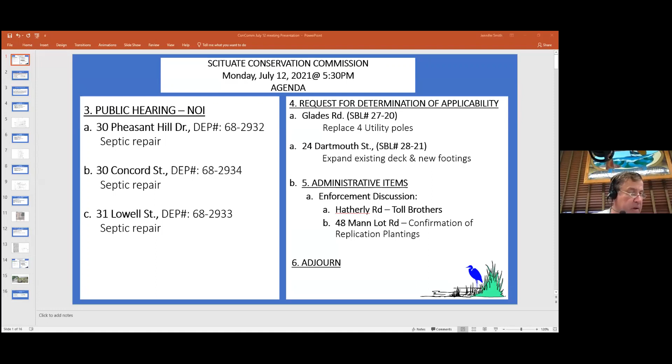Okay, we can move right into 30 Pheasant Hill.

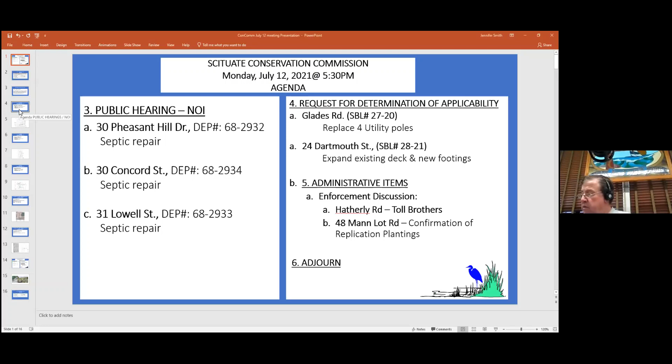On July 12th, 2021, 5:30 p.m., the Town Hall, Scituate Conservation Commission will hold a wetlands hearing under Chapter 131, Section 40 of the Massachusetts General Laws and Section 30700, Town of Scituate Code of Bylaws, regarding the application of Richard Hom and Janet Camacho for work related to a septic repair at dwelling at location 30 Pheasant Hill Drive, Scituate. Abutters and other interested parties are invited to attend. Information to access the meeting is available on the agenda posted on the town website.

Okay, we have someone from Morse Engineering. Yep, for the record, James Garfield. I'm an engineer at Morse Engineering, here tonight representing the applicant for this notice of intent associated with the septic system repair, 30 Pheasant Hill Drive.

Our property lines are shown here in bold. Pheasant Hill Drive is down at the bottom of the page. The existing 3-bedroom house is centered on the lot. The subject resource area is a BVW shown to the rear of the lot in a blue line. We also show the 50 and 100-foot buffers in red and green. The existing site is serviced by a failing Title V system composed of a septic tank and leaching field in the rear yard, the majority of which lies within the 50-foot wetland buffer.

We're proposing a new septic tank and pump chamber, which will pump the effluent uphill to the front yard, to a Presby EnviroSeptic leaching field, a portion of which actually resides outside of the 100-foot buffer, and all of which, in terms of the leaching field, resides outside of the 50-foot buffer. We're also proposing an erosion control barrier down gradient of the proposed work. So with that, I'll leave it to you for any questions.

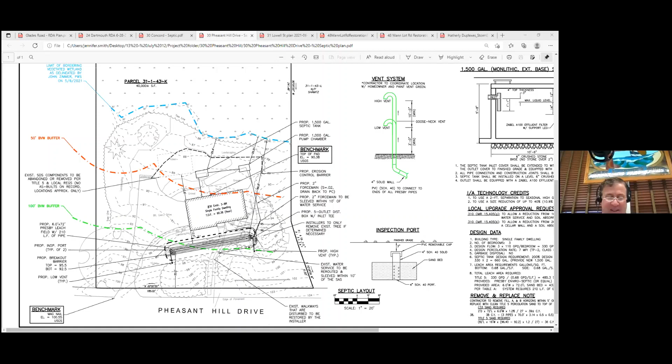Thank you. Number 30 Concord. On July 12th, 2021, at 5:30 p.m. in the Town Hall, the Scituate Conservation Commission will hold a wetlands hearing under Chapter 131, Section 40 of the Mass General Laws and Section 30700 of the Town of Scituate Code of Bylaws, regarding the application of Tom Epwich, for work related to a septic system and a dwelling located at 30 Concord Street, Scituate. Abutters and other interested parties are invited to attend. Information to access the meeting will be available on the agenda posted on the town website.

And we have Morse again. For the record, James Garfield with Morse Engineering, here for the septic system repair along with this notice of intent at 30 Concord Street. This site resides in Humarock. The total square footage of the lot is 7,500 square feet, and the existing 3-bedroom house takes up a good portion of that. The site lies entirely within FEMA flood zone AE elevation 13, and it's currently serviced by a failing Title V cesspool located in the rear yard. We're proposing a new 1,500-gallon septic tank, which will flow by gravity to a crushed stone leaching field in the right side yard. There's not too many other places to put it on this site. So with that, I'll leave it to you for any questions.

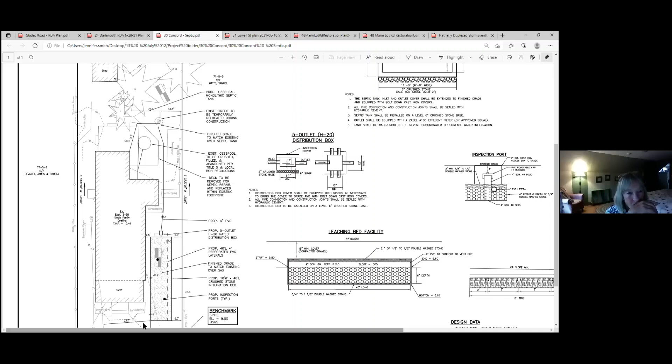Thanks, Doug? No issue with design. Squeezing it in there, you're right, no place to put it. And it's the same issue as the last plan, so I'll go ahead and say it: James, either the bearings or your north arrow is wrong on both of these plans. Glad I didn't do them. Whoever's under the bus right now might as well change the oil. I'm doing your brand new surveyor a favor, have him check that. All right, I'll let them know. Good, thanks Doug.

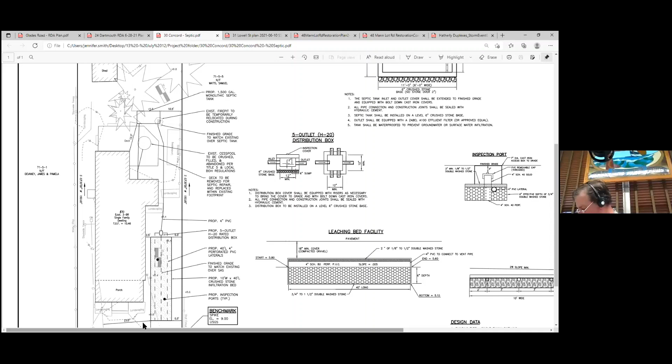Penny? Nope, it looks good to me. Thank you. Okay, what we got here, Jen? Yeah, all set. Brendan? I have no questions. Thank you. Amy?

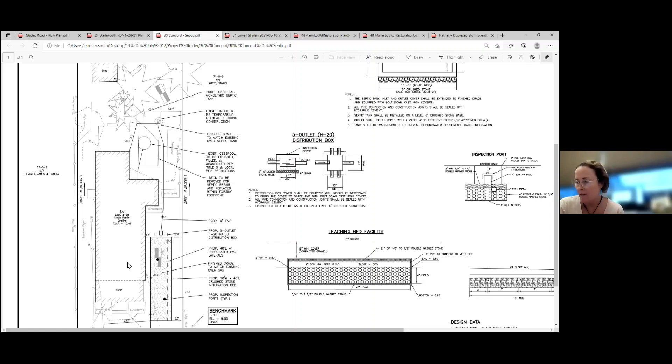No significant change of comment from the last one, other than it is a barrier beach, coastal dune, land subject to coastal storm flowage, no DEP comments, badly needs an upgrade. And I inquired on Board of Health on all three of these, but none of them are through Board of Health yet, but we'll be getting the approved plan that they do approve, which they will. I think the variance applies on this one, as well as the next one coming up, and there was a comment on Pheasant Hill too, but nothing that would prevent us from closing. So I think for abutters, maybe we could do that. Thanks, okay, anybody in the audience?

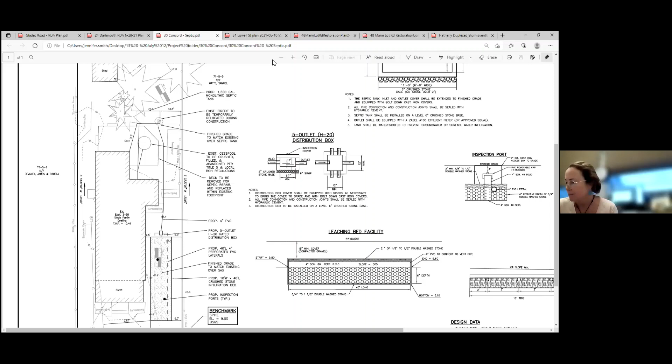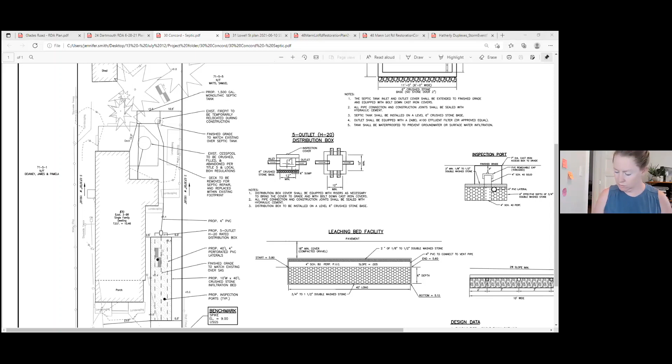And I don't have anything to add for this one, so I'll take a motion. Make a motion to close. I'll second it. Richard seconds. So Doug, yes. Jen, yes. Brendan, yes. And Frank, yes. Great, thank you everyone.

31 Lowell Street, July 12th, 2021, 5:30 p.m. the Town Hall, Scituate Conservation Commission will hold a wetlands hearing under Chapter 131, Section 40, Massachusetts General Laws, and Section 30700, Town of Scituate Code of Bylaws, regarding the application of Stanley and Lynn Velazza for work related to the septic repair on the dwelling at 31 Lowell Street, Scituate. Abutters and other interested parties are invited to attend. Information to access the meeting is available on the agenda posted on the website.

Frank, we have Rob from Grady's on for this one. Good evening, Rob. How are you doing? Good, how are you? I'm Rob Carlazona from Grady Consulting. I'm filling in tonight for Darren. He's on vacation this week.

Basically, this is a septic repair plan for 31 Lowell Street down in Humarock. As you can see on the plan, this house is right on Humarock Beach, and the seawall is labeled on the right side of the plan. Just like almost all of Humarock, we have the resource areas: land subject to coastal storm flowage, FEMA flood zone, velocity zone, barrier beach, and coastal dune.

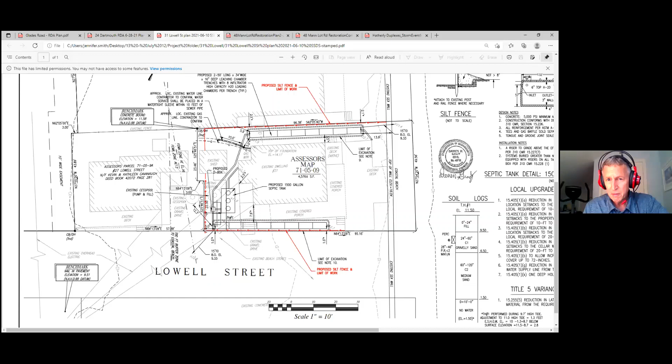I'll second it. Richard got a second. All in favor? Doug, yes. Jen, yep. Brendan, yes. And Frank, yes. Thank you. Oh good. Great, thanks a lot. All right, thanks guys.

This is for Mass Electric. On July 12th, 2021, during the 5:30 meeting at Town Hall, the Scituate Conservation Commission will act on the request of the Massachusetts Electric Company for determination of applicability of the Massachusetts Wetlands Protection Act and the Scituate Wetlands Bylaws for activity related to replacing 4 utility poles along Glades Road in Scituate. Abutters and other interested parties are invited to attend. Information to access the meeting is available on the agenda posted on the website.

Someone from Tighe and Bond? Yes, we have Jeremy on the line. Good evening, for the record my name is Jeremy Degler with Tighe and Bond, representing the Massachusetts Electric Company tonight. This project is for utility pole replacement, replacing 4 poles along the north end of Glades Road. This work is within land subject to coastal storm flowage, 100-foot buffer zone to coastal beach, coastal bank, and salt marsh. Coastal beach, coastal bank, land subject to coastal storm flowage - yes, I think I covered all of those.

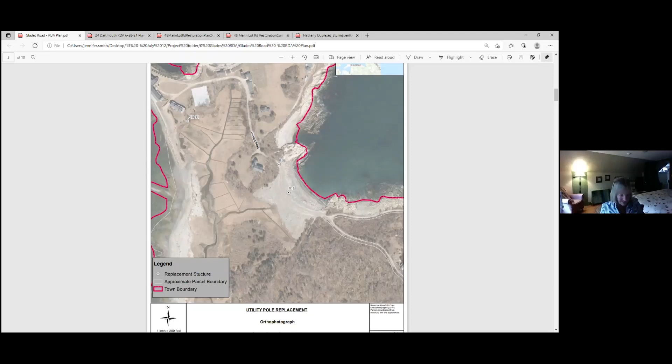Okay. Penny? Sure, no, it looks lovely. There we go. Brendan? I have nothing. Doug? No, all looks good, they need to be replaced. Right, Richard? No, I'm fine. Amy? Yeah, I mean it needs to be done. Pretty confident Mass Electric and their contractors have standard BMPs for a one-day project, minimizing all impacts. I would say closing would be great. Comment from anybody? Yeah, anybody in the audience for this?

So I have a question. Typically when you see a pole removal, they put up a new pole, they pull the old one, but then they leave the other one attached, so there's only one in the base, but there might be another pole hanging onto that until other stuff gets moved. Is that how that usually works, or? Yes, that's exactly it. But in terms of ground contact and stuff, there'll only be one pole. That's correct. Okay, all right.

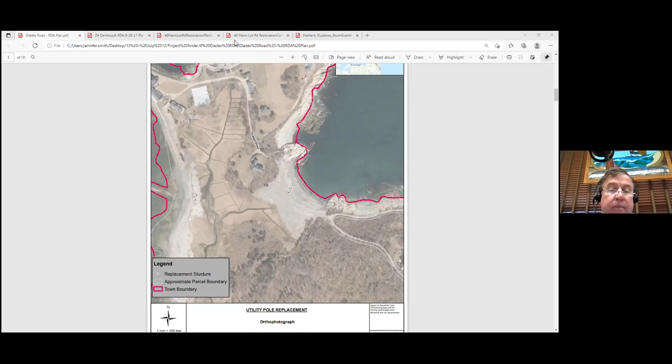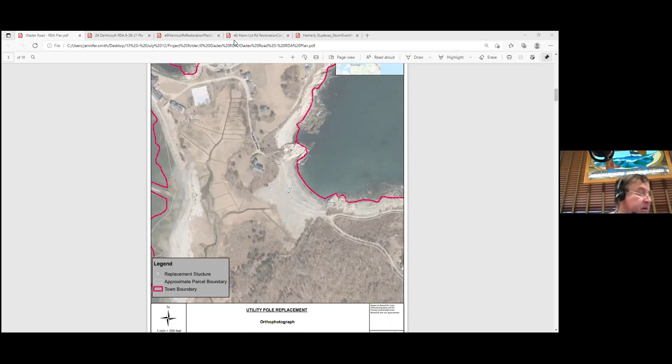I don't have anything else, so I'll take a motion. Okay, so you guys were neck and neck. Penny made the motion, Richard did a second. All in favor, Doug, yes. Jen, yep. Brendan, yes, and Frank, yes. Great, thank you very much. All right, thanks for meeting with me tonight. Have a good night. Thank you.

24 Dartmouth Street. On July 12th, 2021, during the 5:30 meeting at Town Hall, the Scituate Conservation Commission will act on the request of Greg O'Brien for determination of applicability of the Massachusetts Wetlands Protection Act and the Scituate Wetlands Bylaw for activities related to replacing and extending a deck on property located at 24 Dartmouth Street, Scituate. Abutters and other interested parties are invited to attend. Information to access the meeting is available on the agenda posted on the website.

And who do we have for this? Well, we should have Greg O'Brien. Tom Devane has raised his hand - it could be his neighbor that I met. So I'm sorry, who's presenting this? Nobody. Yes, I'm presenting it, this is Tom Devane, I'm Greg O'Brien's neighbor, he is unavailable tonight. And basically what he would like to do, with your permission, is to replace and extend his deck.

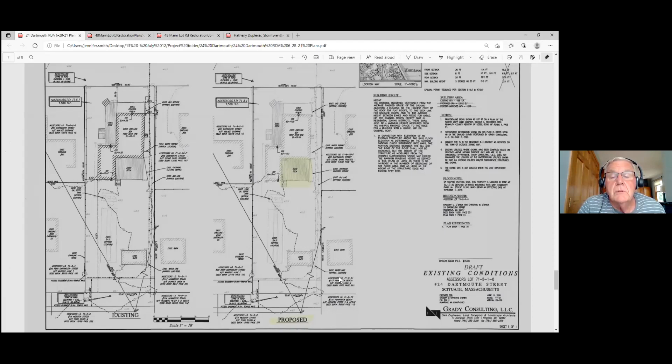Well let's see, again I'm going to go to Richard just because it's in the hood. Yeah, I don't know this house nearly as well, it's on the other end of Humarock. I do know it well enough to know its relationship to the street, and it looks like - I didn't realize it was going to be this big until just now. That's helpful. So existing and then, yeah.

What's it look like, Richard? 5 feet more all the way around? No, this is Tom Devane. The existing deck is 16 by 20, and he would like to make it 20 by 20, so adding 4 feet on the south side.

That's helpful, thank you. That's not bad, Richard. No, it's not. So he's adding 4 feet. He must also be repairing the existing deck while he's at it, if he's adding 8 posts to that. So we're taking the deck down and putting in a new deck. Okay, that makes a lot more sense, now I can actually picture it.

Other than knowing a little more about how he's getting the posts put in and how he's going to do that, I don't really have any problems or questions, but that is one. The question is, how are they putting them in? What are they going to use and how are they putting them in?

Tom, can you answer that? Yes, post hole diggers. Okay, so no big equipment, no big trucks or anything? No, none at all.

And I'm taking away everybody else's questions now. So what kind of posts are they? It's concrete, putting in sonotubes with concrete. Okay, they're precast, right, Tom? No, they're going to pour them. Okay.

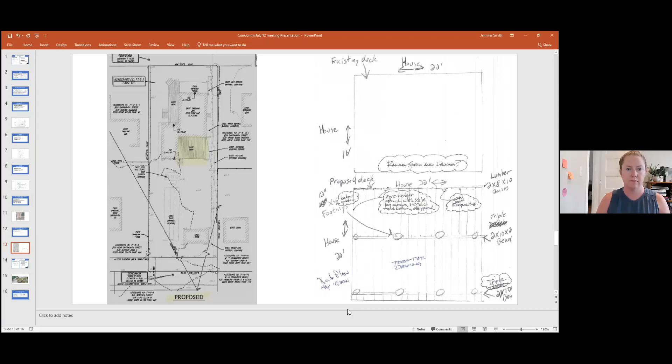Yeah, I think it seems pretty straightforward, honestly. I met with Tom last week or so, and it got called out in the building department, and they went in for a building permit. They didn't have a permit from conservation because, as we know, we're strictly conforming for building permits in the flood zone, which all of Humarock is barrier beach, coastal dune, land subject to coastal storm flowage. So it's a pretty small scale project, modest enlargement of the size it was before of the deck that was there. So anyway, I think it meets the requirements of a dash 3.

Okay, thank you. Anybody in the audience? Okay, I don't think I have any. I was just curious about that topo line, just showing that 10-foot line. Is that something that we usually see, or is that something they'd just done when they were planning to raise?

I'm not sure what the source of this plan is, it's not identified in this particular filing. As you know, on the RDAs we are not quite as strict for plans, because we're trying to help people get these projects done. There's a plan by Grady in here. Yeah, Grady, if I may, Mr. Chairman. Sure. Amy, this plan was done about a year ago for a different reason.

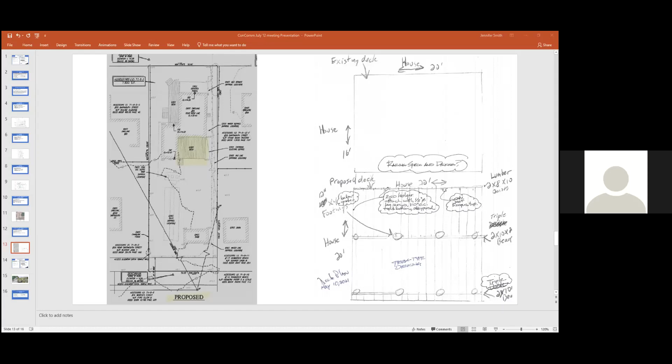They were proposing to move the house, so this is basically an existing conditions plan. So in talking with Amy, we needed a plan of some sort to show you. So I used this existing conditions plan, highlighted the existing deck, and showed that there was an addition, if you can see the little yellow line, 4 feet to the south. So this plan wasn't put together for the purpose of taking the deck down and asking permission to restore it, rebuild it. Okay, thank you.

You're welcome. I don't have anything else. Do I have a motion? Dash 3, please. A second? Second, I'll second it.

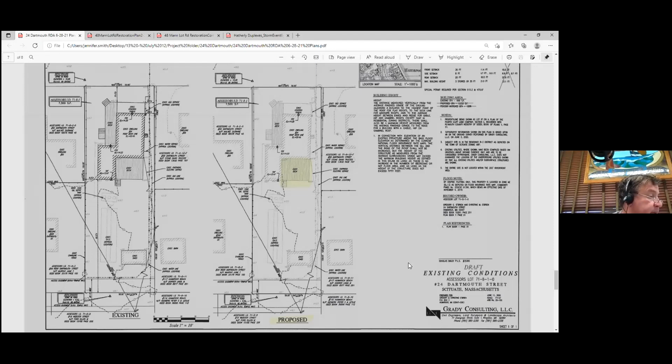Thank you, Doug. All in favor, Richard? Sure, yes. Jen? Yep. Brendan? Yes. And Frank, yes. Great, thank you, Tom, thank you very much, appreciate your time. Good night. You too.

So now, Amy, do you want to go next with administrative issues? Well, yeah.

Actually, what we'll do is, I guess we'll just go. We have two discussion issues on. One is Toll Brothers, Hatherley Road, and we do have some materials that were distributed to you before, which you can go through. I'm pretty sure we've got Dave Buckley and Scott Michelli on the line here, so I'll turn it over to them, and they can maybe go through some questions that you might have.

It's pretty evident upon the inspections that we've been doing, and just the weather. Everybody can see it's been raining. We've had a lot of rain since mid-June till today, and we've had some pretty consistent blowouts with the stormwater management on the site in particular.

Last week we met with the team from Toll, and they went through a series of things that they're doing to try to get the site under control, and basically what they strongly feel contributed to the massive release that we had to the drain off of Oceanside, resulting in that plume you all saw pictures of from the June 22nd rain event.

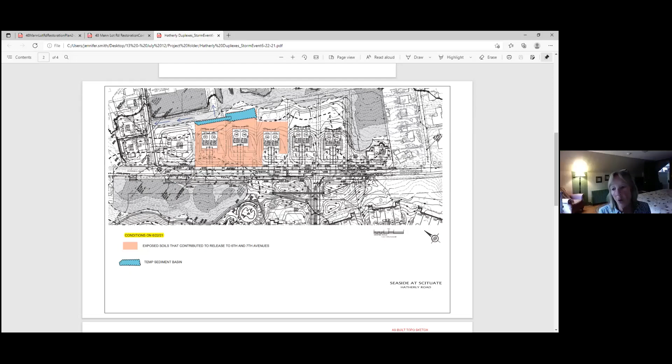That they need to be prepared at all times for the worst case scenario. That's my feeling. And if that means this should not have happened at this stage of the game - we've had enough problems out there that they should have been over prepared. That's my feeling, but I'm going to leave now.

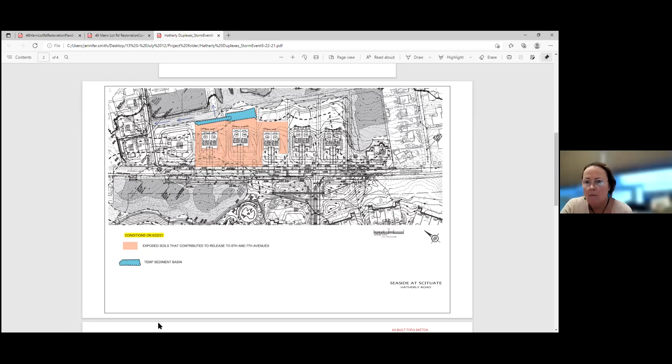All right, well let's let these guys in. But we did want to keep it on the briefer side. I'm unmuting Scott first and Dave. You guys are on, you can keep it brief. It'll be good, I'll keep it as brief as you want it to be.

We'd certainly not like to be here for this reason tonight, but we acknowledge our responsibility and our failures of what's happened out there. When we met out on the site, we were coming here tonight to talk about that one singular rain event and what went wrong in that event and what we did after that event. And even the rain events we've had since then have exposed other problems we have on the site. Collectively, we acknowledge we need to do better.

Collectively, Toll Brothers as a team are trying to pull together that plan for different areas of immediate need and addressing those. I think to what Mr. Harding was mentioning, I kind of think we got lulled into a little bit of a false sense of security when we didn't have significant issues through the spring. And then all of a sudden June comes along and we get, not crazy rain events, but just one after the other. Once we think we've fixed one problem, it exposes some other weakness that we have.

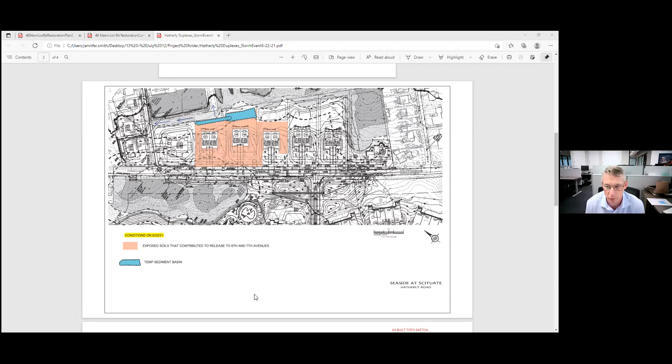So the check dam, yeah. If you go to there, I think there was a plan. This image is good enough.

Take this structure, which was just installed. The water came down this past Friday and hit erosion control measures at the very end. If you look far in the distance, that little turquoise blue line represents that section of silt fence that was contiguous. Instead of going straight out into the marsh, which is what the water should do and is designed to do, because we have erosion control there to protect the marsh temporarily, it actually went left and raked across the back of those entire lots.

So one of the things we wanted to do as part of this evolving process to perfect this area was to sod this swale and remove that silt fence in that turquoise section, to allow the water to go over completely stable soil now and out into the marsh, not into our job site, because our site isn't designed to handle all that street drainage.

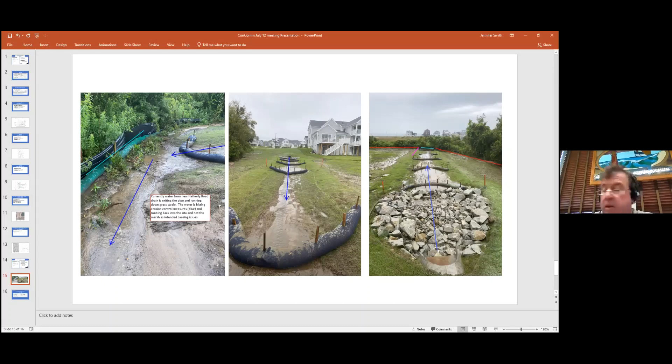Let's hope we don't get any more rain, huh? That would help as well. Yep, okay, all hands on deck. Thanks, I appreciate you being with us tonight. Thank you. Thank you. Thank you.

I didn't cut anybody off, did I? Anybody else wanted to say anything? Good, Frank, okay, all right. Thank you, I think we got one more hearing. Thanks a lot. We do? We have a replication for Mann Lot Road.

Yeah, I was asked, requested by the owner of 48 Mann Lot Road to put his project on the agenda. We don't typically put confirmation of replications on, but that's all I'm gonna say. I'm just gonna unmute.

Is it Dr. Price that's on, or his engineer? Yes, it is. We have a couple of hands raised. He's on. Amy, before they talk, what is the goal?

Yeah, so maybe I can jump into this just a little bit. This is a wetlands replication on Mann Lot Road that was supposed to have been done with a project some time ago. It was not - I think it wasn't totally completed. Then there were changes to the site. The applicant here never got a certificate of compliance. And then when we went out to do the certificate of compliance, we realized that this wetlands replication was not in compliance, and there were other changes to the site.

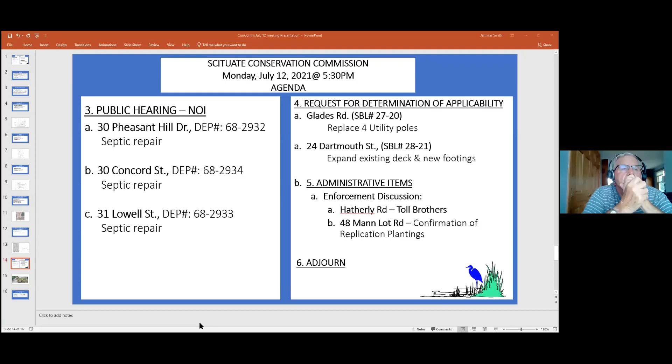You're right, Frank. Things have changed over the past 10, 20 years. The project has been completed according to the plan. I think a consideration can be made in this case. I don't know if you've had other cases where people are pending mortgage refinancing or not. This is a special circumstance. There's black and there's white, but I always think in certain instances there are some gray areas to be looked at. And I'm not asking the board to put yourselves in a difficult position with the next person that comes down the pike and asks for the same thing.

But when people like Toll Brothers are being given certificates of completion right and left, and considerations for—I might have stated the wrong thing. So Toll Brothers doesn't get a certificate of compliance for the whole project, but what we are issuing are certificates of occupancy, so that people can go forward. They have their occupancy, they can get financing, and the reason they can move forward on this is because they've bonded the project.

So, yeah. I don't know how we resolve this, because if we're voting—so typically, as a commission, we typically do not vote. The agent does the COCs. Got it. And we don't typically vote on that. This is before us.

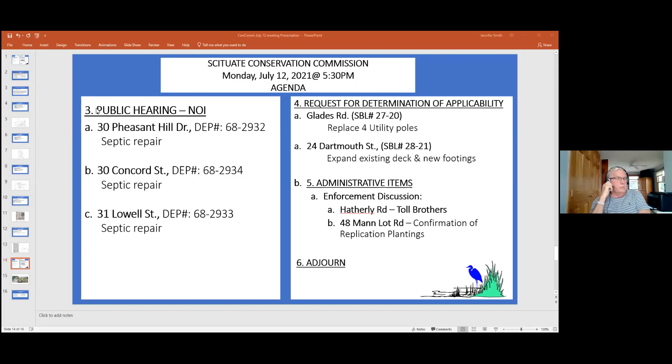And that's where Frank is right. The rules have been changing steadily and making it harder for people to get loans or refinance. The result is it starts falling back on us.

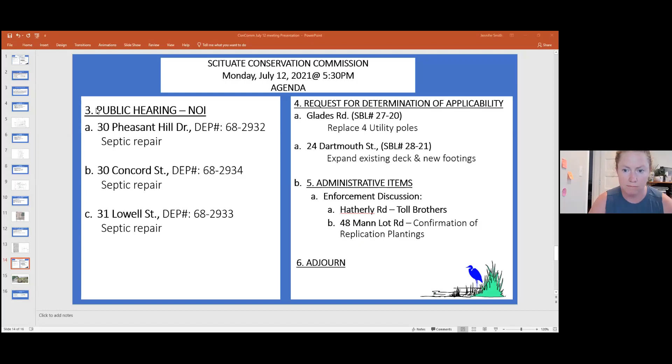I don't think we can recommend lending institutions, but why did you stop at 4? Because I'm not going to tell you who I refinanced with, but you didn't list mine, so I'm just wondering. These are 4 local banks that I have done business with for the last 40 years. If they're not going to give me a mortgage, I don't think Bank of America or Santander is going to. They don't know me from a hole in the wall.

All right, we have a meeting next Monday, right? Yes. I'd like to discuss this internally a little bit, get back to some of the members individually, and see if we can bring this to a head by next Monday. Frank, I will look in this DEP replication manual and see if there's some kind of condition they put out there. I encourage consistency with your decisions in this, and consistently the conditions require a length of time. That's where I'm at.

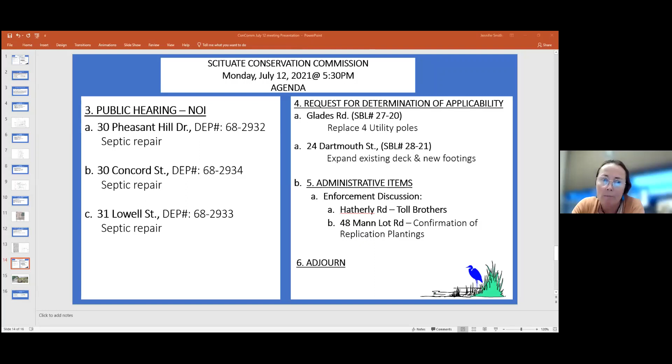Well, that's what I'd like to do, because we've got a couple other things to deal with this evening, but I'd like to get this sorted out. So if you could look at that and get something out to us, Amy. In the meantime, we'll talk about that. Thank you.

What else do we have? I want to thank everybody for responding on that forestry census, and I just hope you understand we're not planning on doing anything at the moment, other than we have the report from Phil. When we have some time, we can talk about that and look it over some more.

And that enables us to move forward with other programs. I don't know if anybody caught Chronicle the other night, but there was an interesting piece on carbon store in forests. Andy's spent some time with that, but it's really becoming a big deal how we manage our woods and forests and what they do for us. It was a really interesting piece, but more and more, having healthy forests could be one of the big things we do for our environment, carbon storage, and cleaning up the air.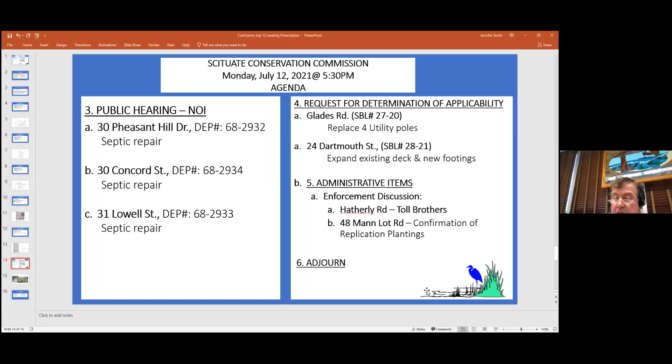Try to find an evening that works for the majority of the folks on the commission. One thought was maybe a Tuesday night, since either Jen or Amy or both of them are typically working. We could try to have it here at Town Hall, but I was thinking maybe more like at the WPA building or some other place where we can just all sit and talk about things, with our philosophies on things like mitigation and how to deal with some of these pieces.

We don't get a chance to discuss that often enough. We seem to be at a meeting and then have to discuss a specific piece, but Jen's brought up a number of good issues, and Doug has too. We've all had some of these things, and I think if we can just talk about them along with the other things going on with the commission, without the constraint of closing so we can get to another hearing, it would be helpful. I don't know if anybody can do it tonight, or we can send out something.

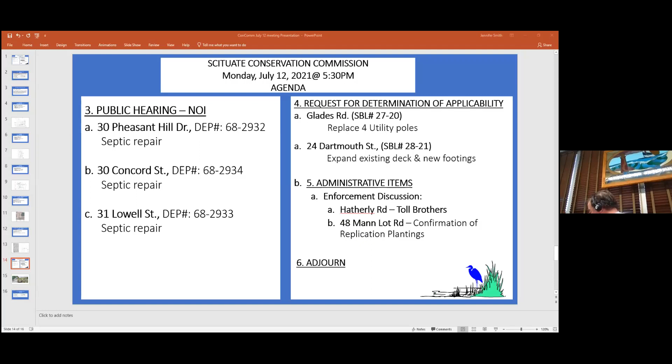If Tuesday seems to be the best evening, we're eating up July pretty fast. We've got a meeting again next week, but we could do something maybe the 27th, or the 3rd, 10th, or 17th. I'm fairly flexible, I don't know if anybody else has taken a look at their calendar. Maybe Jen could shoot something out, and if the majority of us could do that, I'll buy the pizza.

Sounds good. Hold the anchovies please. No, anchovies on the side. Well, all right, there we go. See how well we can get along. With the right incentive, it'll work out well. Hey, that's why we do things as a commission.

I think we do a good job with it, and I think it's important to look at all sides. I saw that the Boston Public Schools were criticized for voting unanimously too many times. So I think we're expected to have some disagreement between us, as long as it's constructive.

Just as a point of reference, I looked at my calendar. The last two weeks in July, I'm open. I've got some sort of commission meeting on the 19th, but other than that, I'm free.

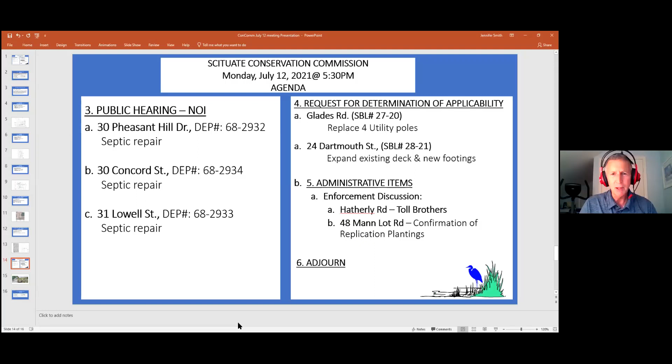The point of this meeting was that it was to be short. Next meeting is going to be a long one. No, seriously, next meeting you've got some tough decisions to be prepared for. We love each other very much, group hug, but it's okay. There's a saying in the construction world that the time expands to meet the work, the work expands to meet the time allotted.

You got it. Oh, all right, we have a hand up from a phone number. Hold on.

Hi, this is Tim McCarthy, 16 7th Ave. I thought I pressed the right buttons to ask a question during the Toll Brothers discussion, but evidently I didn't. I would just like to point out that our yard at 16 7th Ave has never flooded from rain prior to the Toll Brothers subcontractors' drainage and rainwater runoff project up there. Since then, since the 22nd, our yard has flooded with every single rainstorm, as recent as this morning's. So it concerns me that the plan is to fill the marsh with water, because that water ends up in my yard.